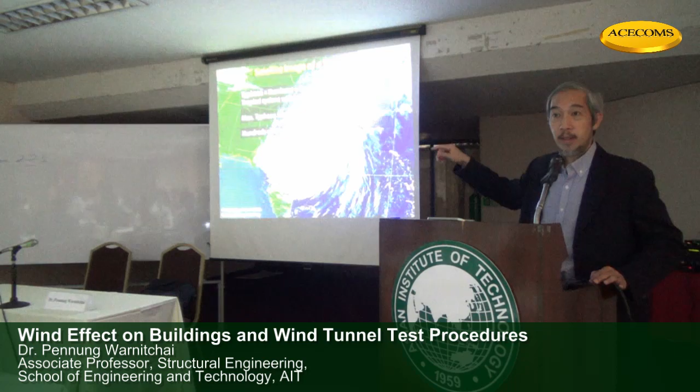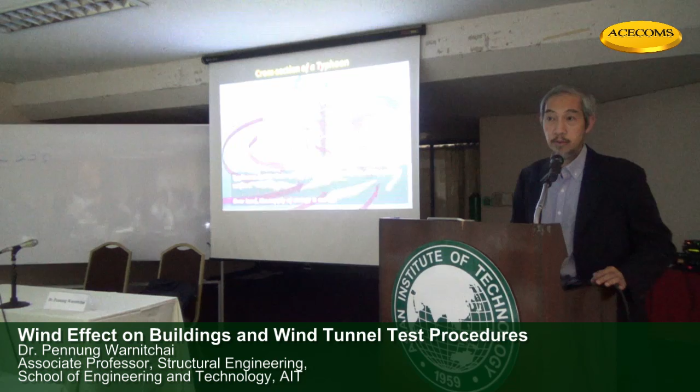If you look at the cross section, it looks like this. This explains briefly the mechanism that produces energy for the cyclone. Basically, it has to originate over the surface of the ocean, where we have a supply of warm, moist air. The warm, moist air will be sucked to higher altitude and it will be cooled down. It will condense into water vapor, into water drops. The condensation process will release latent heat. Latent heat will be used to drive the rotational flow. Basically, it uses the warm, moist air over the water surface as an energy source.

As long as it stays on top of the ocean surface, it can continue. But if it enters dry land, when it crosses the shoreline, then you have only dry air, and the cyclone will lose its energy. Over the land surface, the roughness is very high, so it will die out very, very fast. So basically, if it stays on top of the water, it can maintain its strength, but once it enters the land, the strength will drop, and it cannot go very far inland.

This is a picture showing where cyclones, typhoons, or hurricanes originate, mostly in the ocean, but they end in the land, though not very far inland, mostly in the coastal zone. For example, take Australia: inside will not be affected by typhoons, but along the coastline, there are risks, and it's possible to be hit by a cyclone or typhoon.

Some countries are quite free from cyclones, like Indonesia and Malaysia. Some countries are very prone to cyclones, like the Philippines, Vietnam, Bangladesh, and so on, and here, Florida.

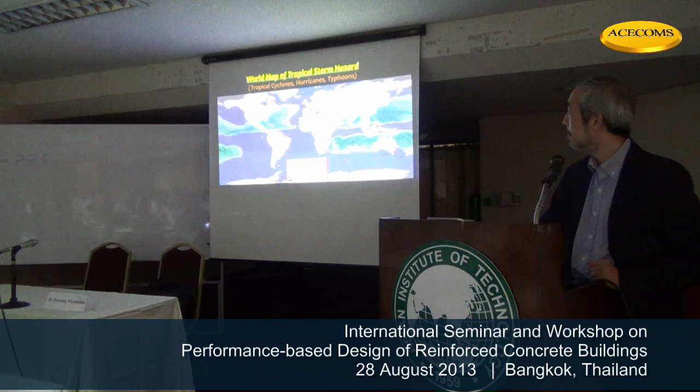This is a picture for Thailand and Vietnam. You can see, comparing between Vietnam and Thailand, that in the coastal zone of Vietnam, so many typhoons hit the coastline. In Thailand, the number is very low, coming maybe every 20 years. But when it does cut through the southern part of Thailand, it can produce disaster.

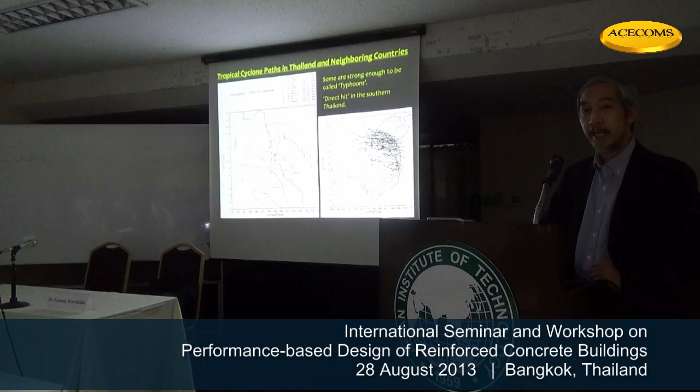Like this case in the Chumporn area, hit by typhoon Gay. We normally divide it into 5 scales, 1 through 5, from 1 being the weakest to the strongest, level 5. This is level 3.

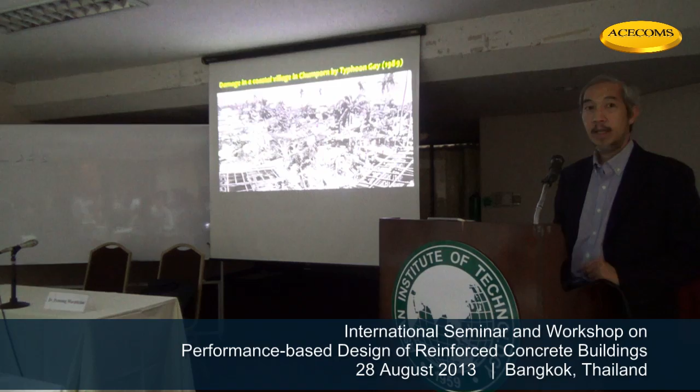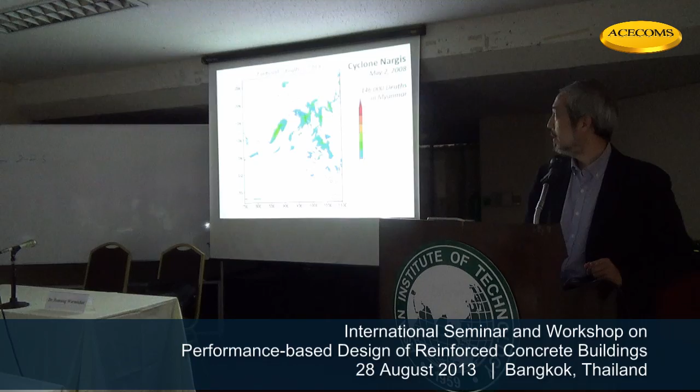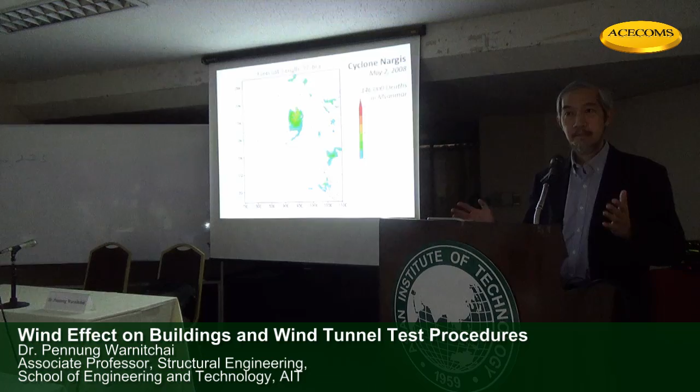About 5 years ago, we had a level 3 to level 4 typhoon. Typhoon Nargis hit the Irrawaddy Delta of Myanmar. Normally, the cyclone or typhoon path goes to India or Bangladesh, but this one followed a not-so-normal path. It turned this way and hit that zone. So it was a rare typhoon for Myanmar, but it was able to produce a lot of damage to the area.

That is the well-known type of strong wind. I'd like to show you another type called thunderstorm. It is very common here in Thailand, where you have a dark cloud and very heavy, intense rainfall in some local area. The size of this windstorm is much smaller, not several hundred kilometers, but just several kilometers. It's a kind of local wind, and it also produces lightning flash.

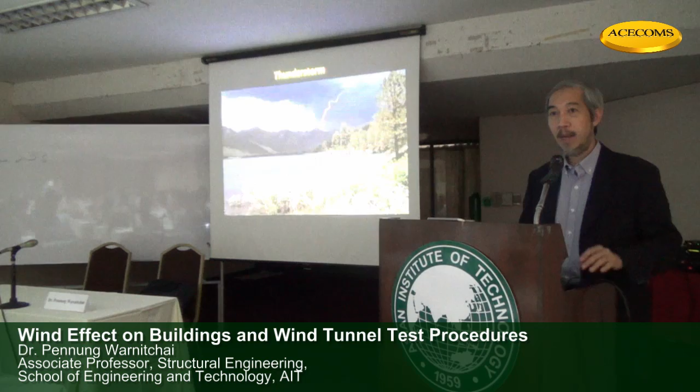So we can check the frequency of this windstorm by looking at the lightning flash like this. This is a satellite image showing the location and intensity of lightning flash. We have this kind of thunderstorm more in Thailand, Cambodia, Vietnam, Malaysia, Indonesia, and other countries. But the people in Japan, for example, do not know about this thunderstorm. This is rare for them.

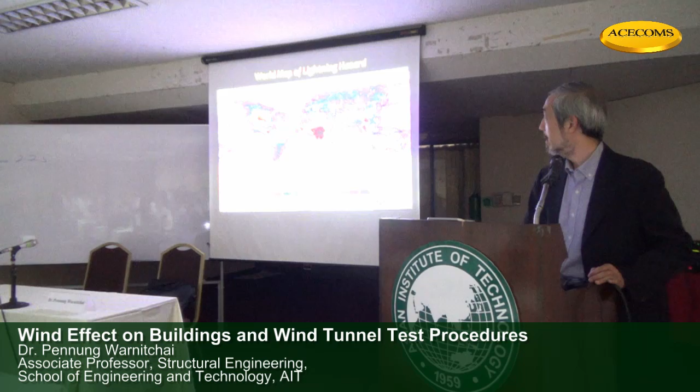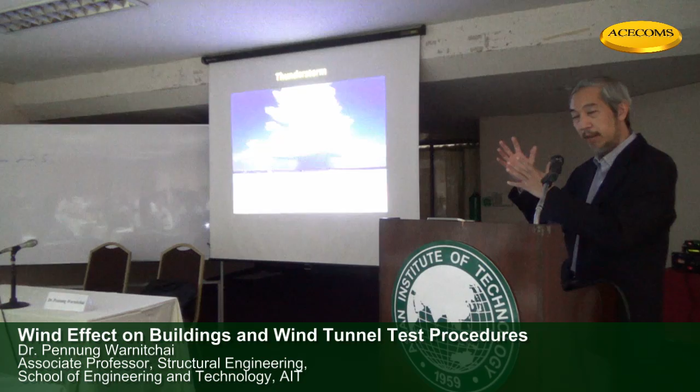This is a picture of the cloud. Cumulonimbus produces intense rainfall, and it will bring down the air when we have intense rainfall. The air will spread out in a radial direction, and then return back in a circulation route. So if you are here, you don't feel the wind because the air is coming down on your head together with the rain.

If you are here, the wind just turns from vertical to horizontal, and that's when wind velocity will be strongest. Now if you are here, it's already spread out, and velocity will reduce before it returns back. So the wind velocity is not uniformly distributed. It's very high somewhere near the center, but not at the center, and then it reduces. So if the structure happens to be here, it can be subject to very high wind velocity.

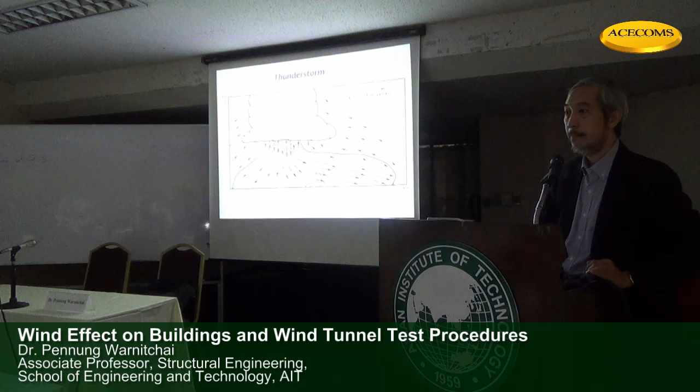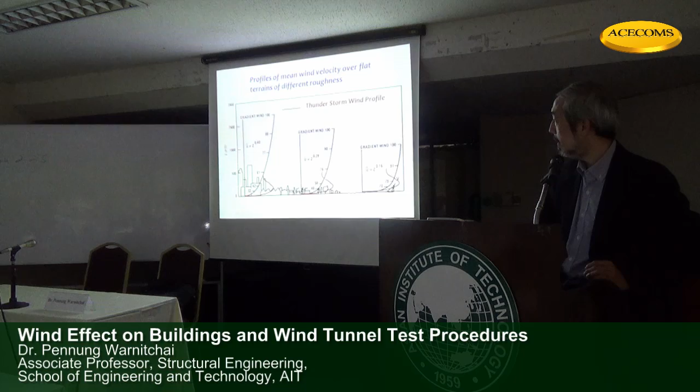Now this is a picture showing the wind velocity profile. We plot how wind velocity varies with the height above the ground, for different types of terrain - this is a city center, this is a small town, this is open water. But this profile is for large scale wind, like cyclone. For thunderstorm, which is small scale wind, it looks different from this profile. But if you look at your design standard or design code, it will follow this black profile. No one mentions the red profile from thunderstorm.

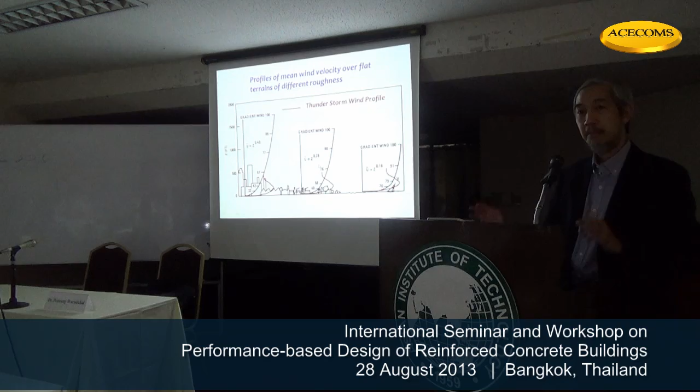Basically, we still do not have design guidelines for how to handle thunderstorm. The wind is strong near the surface, reaches maximum somewhere around 20 meters above the ground, and reduces when it's around 40 meters or higher above the ground. So it can produce a maximum effect on structures that are large but not very tall, about 10 to 40 meters high. These are the types of structures that will be most affected by thunderstorm wind.

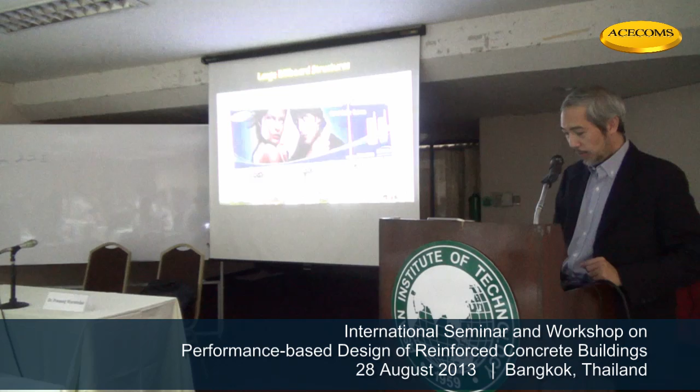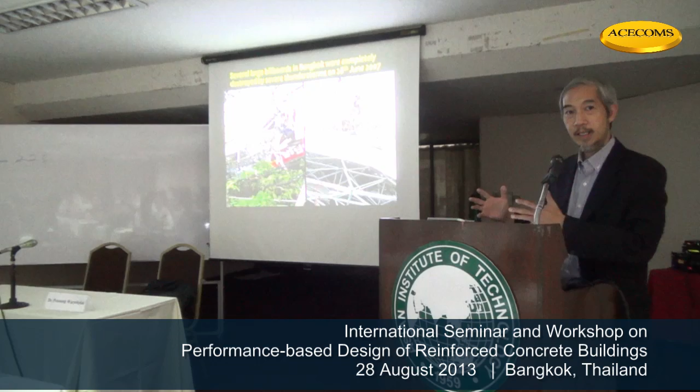Large billboards - I think you have many of these in your country. We have many here also in Thailand, in Bangkok, and many of them collapse from the effect of windstorm, basically from thunderstorm. If a thunderstorm occurs here at AIT, and you go to Rangsit, about 10 kilometers away, you will not feel this strong windstorm. It's very high, intense wind, but only in the local area.

It can produce a wind speed up to 360 kilometers per hour, very high. It can lift a car like you see in the movies.

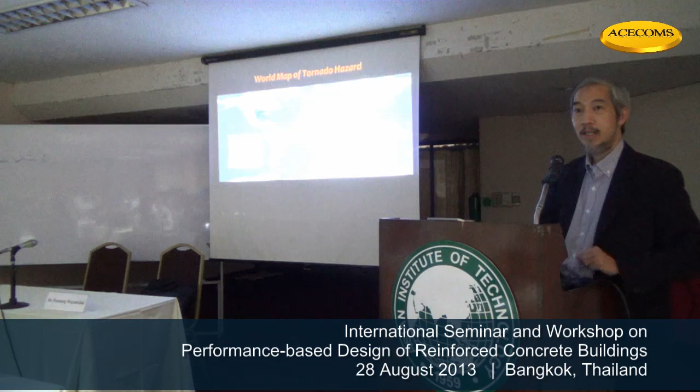Okay, that is about wind. I moved into a new subject called aerodynamics, which will link between the wind and the force - how wind generates force, because the force is what acts on our structure.

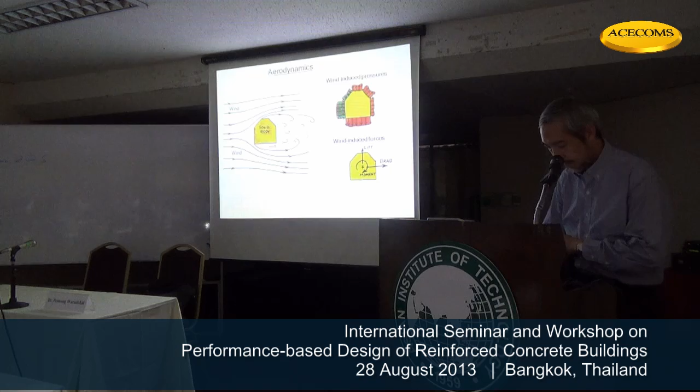So this picture gives you a simplified idea. If we have a solid body in the wind stream, the solid body will modify the wind flow around it, and due to the change in the wind flow stream around the solid body, it will create non-uniform pressure around the body, around the surface.

Say if there is no wind, the pressure on all sides of this body will be equal. The net force produced on this body will be zero.

But when we have the wind stream, the front side has an increase in pressure, the back side has a reduction in pressure, and on the other sides also some change in pressure. Here I use the arrow pointing in to mean increasing pressure, and the arrow out from the surface to mean decreasing pressure.

When you have a change in pressure, non-uniform front and back, it creates a pushing force in the front, pulling force in the back, and not only front and back, also sideways, across the direction. So basically, wind can produce a force not only in the wind direction, but also somewhere normal to the wind direction. And it also produces moment as well, because we have to integrate the effect of pressure around this body.

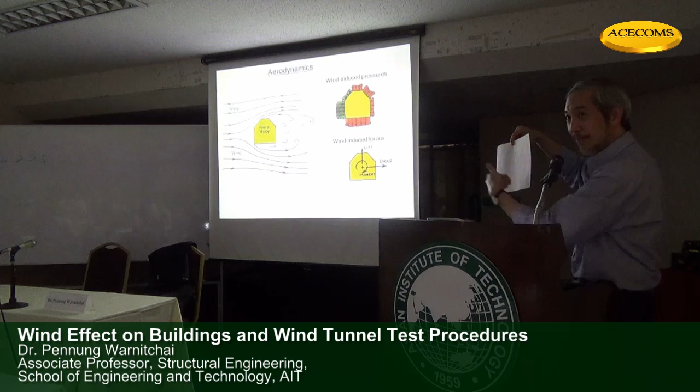Now let me change the question. If the panel is not perpendicular to the wind, what will be the direction of force on this panel? Will it still be along the wind direction or somewhere else? According to aerodynamic theory, the force is produced by the change in pressure front and back, and pressure is always normal to the panel. So even if the panel is inclined to the wind direction, the force will always be normal to the panel. You always have the force perpendicular to the panel for this case.

This is a simple formula to calculate the wind load, which appears in most design standards. We have a term that looks complicated, called velocity pressure - it's one half times mass density of air times the square of wind velocity. This is called velocity pressure. When this term has a unit of pressure, you need to multiply by area to turn it into force.

The area - it's difficult to use the area of the structure or of the object, so we normally simplify them into a so-called projected area. We create a plane perpendicular to the wind direction, and we project the structure onto this plane. So the projected area of this structure is B times L, a simple frontal area - it's the area that the wind will see of the structure.

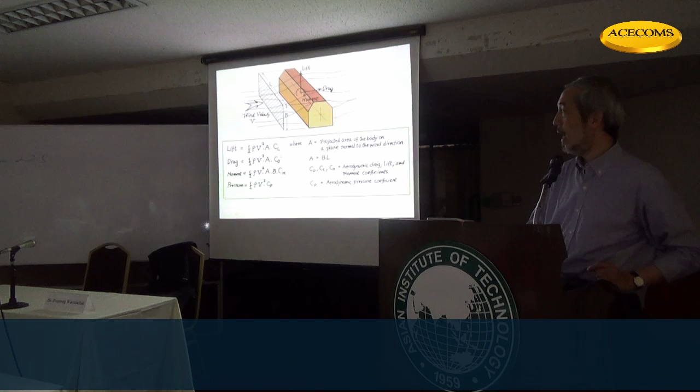And then we correct by a coefficient, called the aerodynamic coefficient. We have drag force CD, lift force CL, and moment CM, and for pressure it's called CP. I hope you have seen this formula somewhere, sometime during your design.

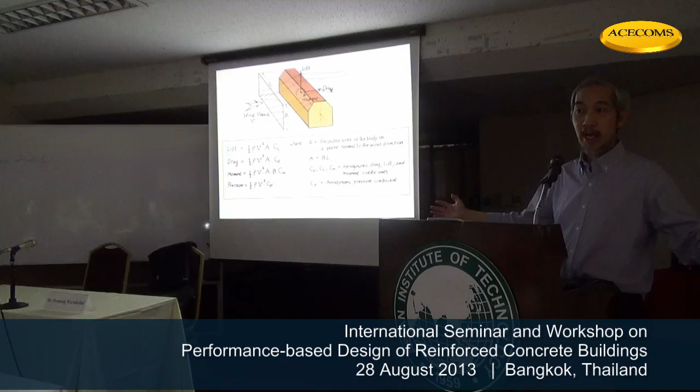But the formula says that if the wind speed increases by a factor of 2, the load increases by a factor of 4. If wind speed increases by a factor of 3, the load increases by a factor of 9, because it's proportional to the square of wind velocity. The load also depends on the area - if you have a large area, you have high wind load. This is completely different from earthquake loading, which is proportional to the mass, nothing to do with area, but wind load is proportional to the area of the subject.

And the aerodynamic coefficient you can take from many tables, many literature, many documents, and also in the design standard. But most of them are somewhere between 0.3 to 2.0. That's the typical number.

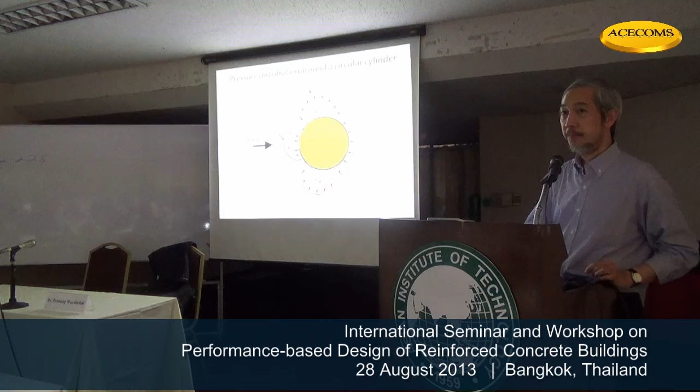This is a pressure distribution for a circular cylinder when wind is approaching this way. In the front, when subject directly to wind, the pressure increases. But along the side, pressure turns negative, meaning it's reduced below atmospheric pressure. On the back it's negative but small negative, while on the side it's large negative. So this provides information for engineers to understand what happens to our structure under the wind.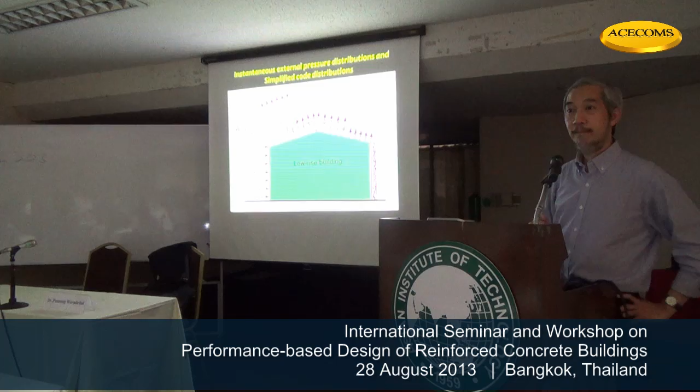These are small buildings. When the wind is coming this way, and the roof has a rather flat angle, the wind may produce additional pressure to the front, small reduction in pressure on the back, and a large reduction of pressure on the roof. That is something important, because this arrow pointing out means the pressure is reduced by a large amount.

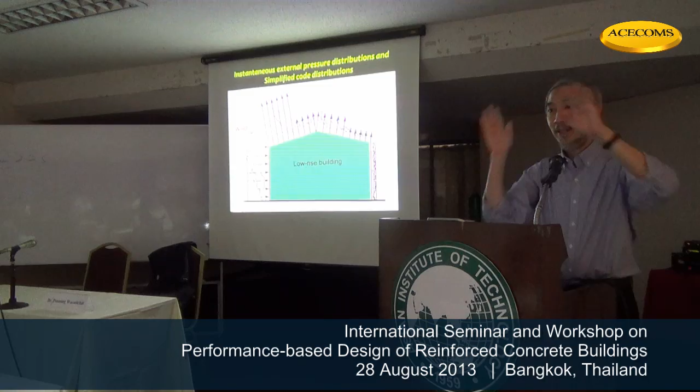Before we have the wind, the pressure outside and inside are equal. So you don't have the load onto your roof except the gravity load of the roof itself. Now you have reduction in pressure outside, but inside you have atmospheric pressure. So basically you have a force pointing upward to the roof, trying to push it up. We call this suction.

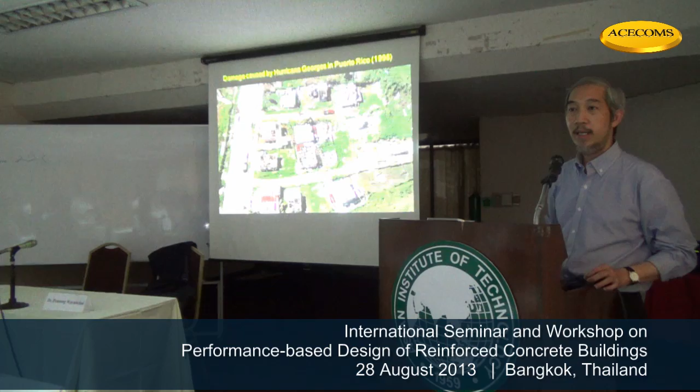And this suction, if you are not designed for it, the roof can be damaged. It may be blown away by a strong wind, like this one. This is a picture of many houses damaged, mostly in the roof zone, roof damage by Hurricane Georges in Puerto Rico.

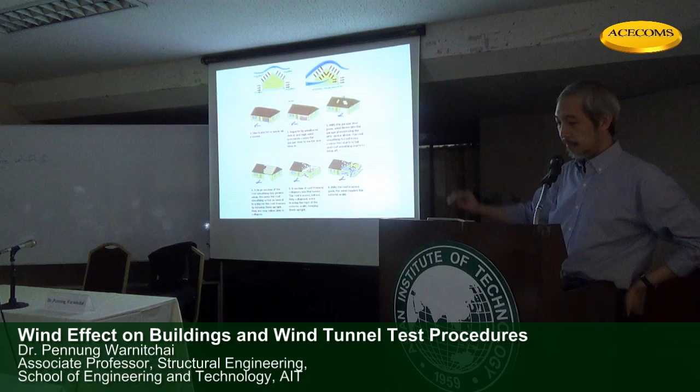Let's explain the mechanism. First, the wind produces negative pressure on the roof, and then somehow the doors or windows break, wind gets inside, adding more pressure internally, producing more uplift effect to the roof, destroying the roof, and then destroying the panels on the side. That's the mechanism that destroys many buildings by cyclone and by tornado.

So in design of such a system, you have to anchor down the roof system to the column, down to the foundation, lock them up to prevent this uplift effect.

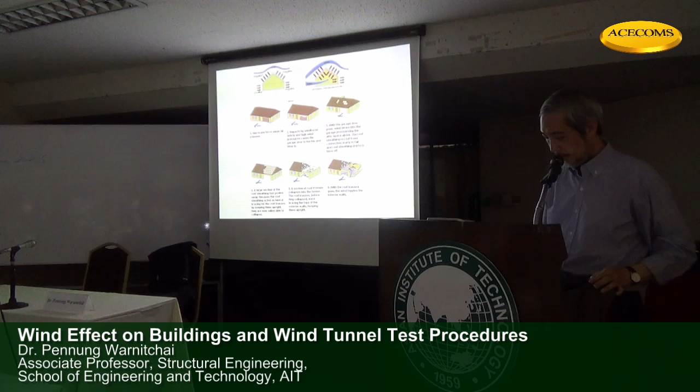But in reality, the load may not be uniform. The actual pressure is very complicated. Sometimes it's heavy on one side, sometimes it's heavy on the other side. It changes with time. It's a dynamic pressure.

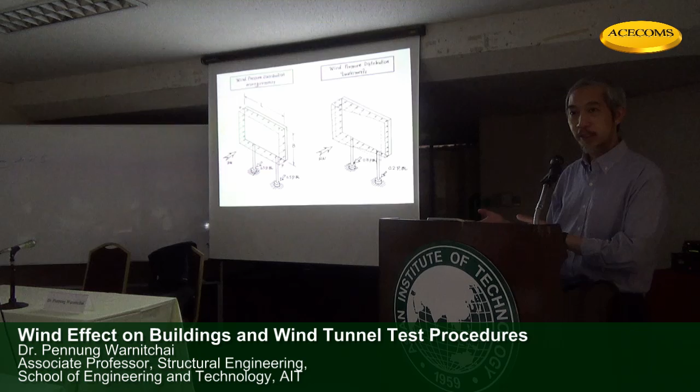Now we are trying to correct this. I already put it into the new standard, but still many designers do not understand this and continue with the normal practice.

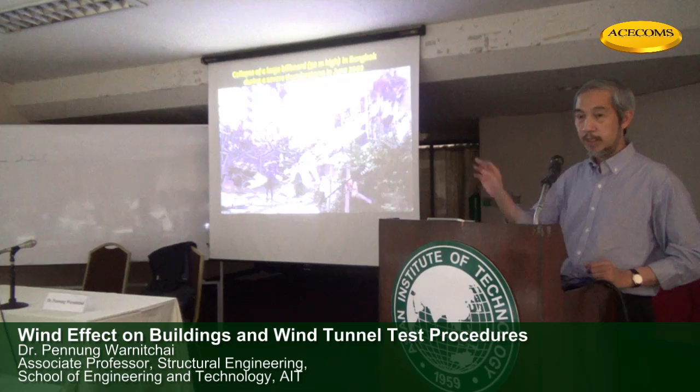This is another effect which is normally not accounted for in many standards. In most regulations, we call this the aerodynamic interference effect. You have one building built, and when you construct this building, there is no nearby building. Later on, somebody else develops another project nearby, creating maybe an equally large building so close to your project, and it produces a channeling effect. It can generate more suction. The loading completely changes by the impact of the nearby structure.